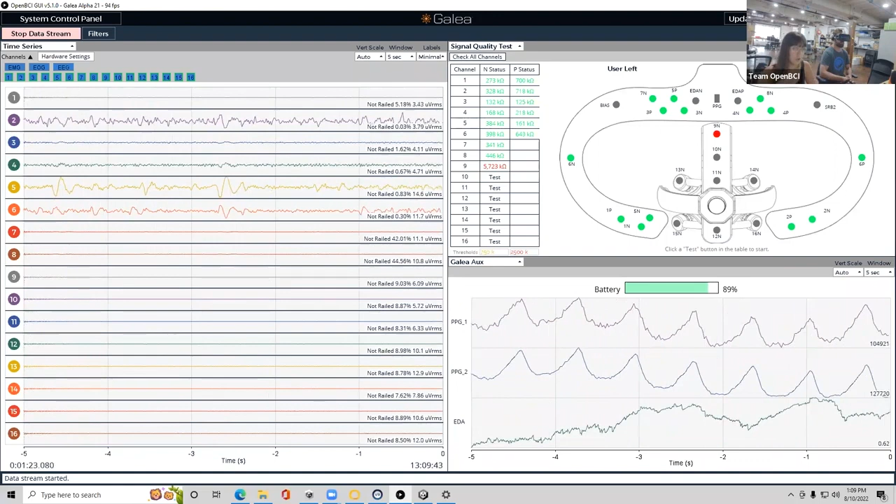So we've set different thresholds for the impedance measurement that we want. Below 750 kilo ohms, we deem it to be a good connection. Between 750 and 2500, it's okay. And if it's above 2500, then the impedance is too high and you should move the headset a little bit until it lowers, which means that the electrode is making better contact with your skin.

So right now, Connor just ran the test and we can see that all the channels are green. That's great, they all have a low impedance. And so we can move on to have a look at some of the data.

Another additional comment is that at this point, the impedance test only works for our passive electrode system, which is in the face interface. The harness that holds the headset on the scalp has the 8 active EEG electrodes in it, and those active EEG electrodes at this point in time prevent us from doing an impedance check, though we're working on a new hardware solution that will allow us to run the impedance check on active electrodes as well.

I think we can first show the auxiliary data and then show EMG, EEG, EOG, etc. If you look on the bottom right, the Galea auxiliary widget shows first the battery of the device and then the PPG data, which is the heart rate sensor, and the EDA, which stands for electrodermal activity, which measures the conductance of your skin, which will change depending on whether you're sweating.

So maybe getting a little bit nervous or stressed. If you look at the PPG lines, you can clearly see the heart rate. Especially when I drink a lot of caffeine, occasionally my heart will kind of skip a beat. But for the most part, you can see this kind of consistent cadence, the peaks and troughs of my heart.

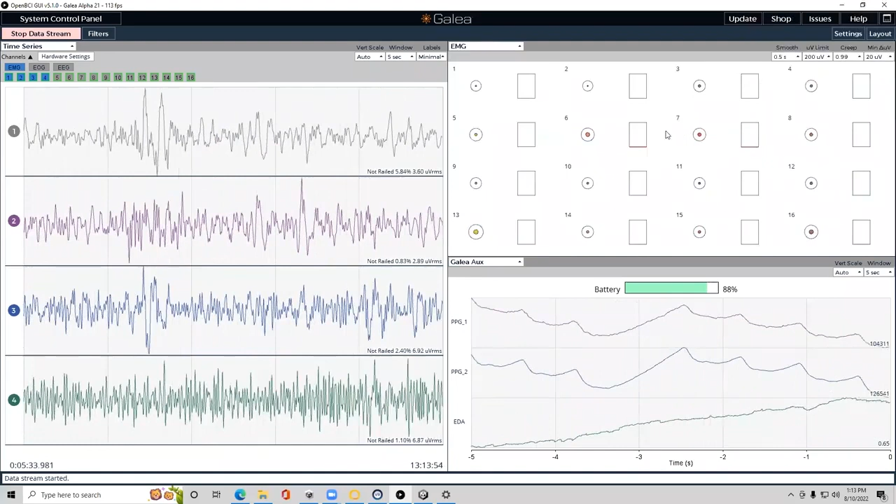You can see them on the left side. Right now we're visualizing the data with filters applied, like a notch filter for 50 and 60 Hertz. Let's open the EMG widget, which processes the data and normalizes it within the window interval that you choose, and the minimum and maximum values that you set.

We're going to do a short demonstration of how to trigger some of the EMG channels. If you smirk left and then smirk right, we'll see the spikes in the left cheek and right cheek channels. You can see them very clearly both in the time series widget and also in the EMG widget normalized.

When he's smirking left, it goes up to 1, and then right goes up to 1. He can do the same movement with the left and right eyebrows. Try 3 and then 4, 3, 4, 3 - that's left eyebrow raise, right eyebrow raise, left eyebrow raise, right eyebrow raise.

Let's do the mini game again so everybody knows I'm not cheating. Connor is leaving his controller on the table, and I'm going to call out a number, and he has to flex the muscle that corresponds to that channel. Let's start. 1, nice.

3, 2, 1, 4. Hang on, wait for it - that one is hard. There it is. Nice. 2, 1, 3, 4. Nice, gotta work on 4, that is the hardest one for you. Definitely, but I can see it. 1, 3, 4, 2 - so you can see that he has pretty good control over the 4 channels.

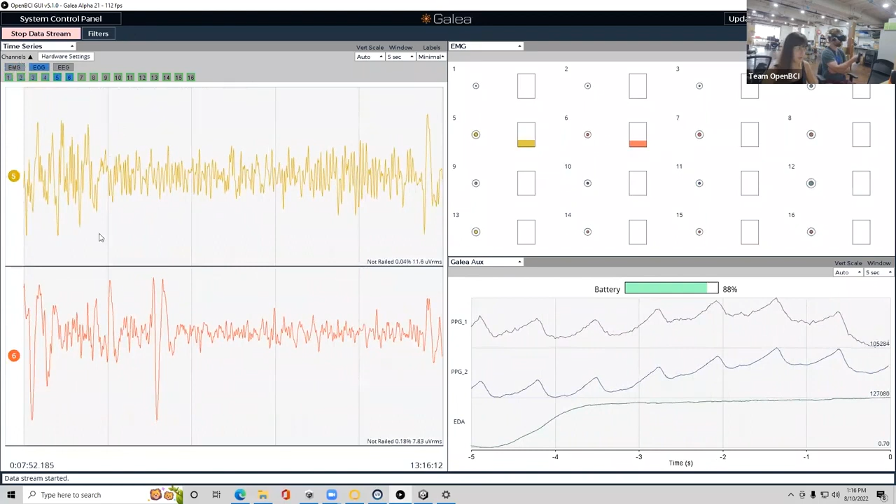EOG stands for electrooculography, and we have 2 channels for this. Can you open the signal quality widget again? If you look in the signal quality widget, we have a vertical EOG channel, channel 5, and a horizontal EOG channel across the face, which is channel 6.

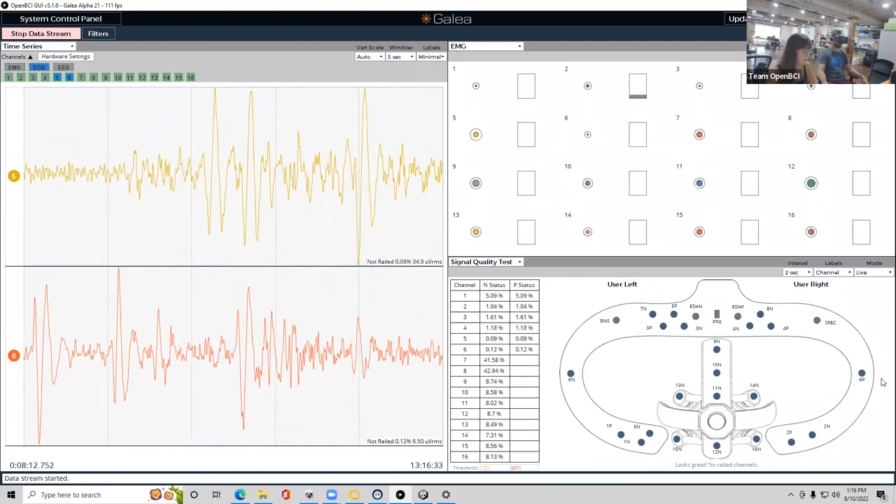To visualize the data properly, we have to disable the filter. I'm going to go ahead and do that. While you're doing that, I'll explain for those who don't know - your eyeball has an electric field. The way this works is we're taking a voltage measurement, or potential measurement, across opposite sides of the eyeball, both horizontally and vertically.

As you're looking left and right, we can see the shift in the angle of the eyeball as the orientation of that electric field is changing. Essentially, EOG is electrical eye tracking, which is obviously an extra data set we're adding to the image-based eye tracking that's in the Varjo Aero headset. Having those 2 data sets together, the EOG and the image-based eye tracking, will help us really validate and confirm the efficacy of both by combining them together.

Thanks for explaining that. I disabled the filters. So right now we're seeing raw data on channel 5 and 6.

Can you start looking up and down, up, down? As he looks up and then down, we can see the movement very clearly in channel 5, which is the vertical EOG. A little bit bleeds into channel 6 horizontal, which makes sense, but channel 5 is the main one to detect up and down movements.

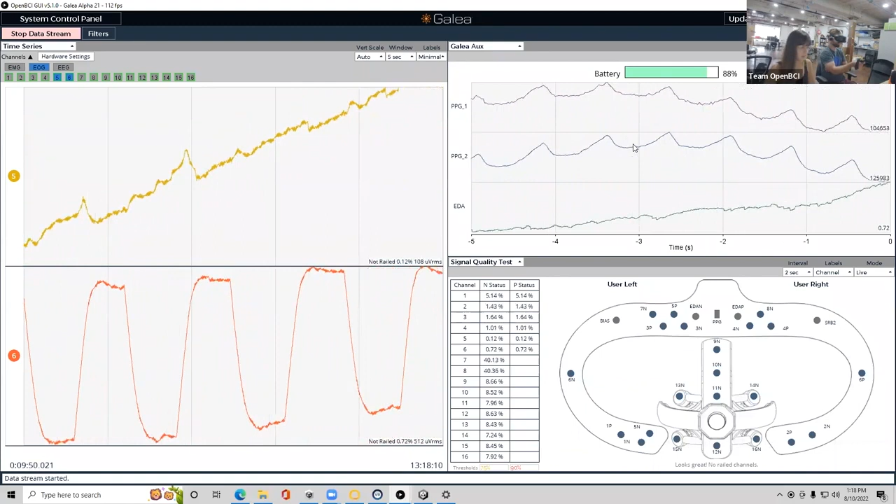Now if you do the same, but left-right eye movements, we also see that in channel 6. That one's very clear. We can also do a combined movement, like if you look to the top right, bottom left.

I have a theory as to why the horizontal looks better than the vertical - mechanically the horizontal electrodes are perfectly aligned through the axis of my eyeball, but channel 5 is actually not perfectly vertical. You can even see it on this diagram - channel 5P is not perfectly vertical above 5N. So there's an angled orientation of that measurement, which I think is part of the reason the horizontal looks much cleaner than the vertical. It's a theory, but we're improving that with the beta hardware design, better aligning channel 5 vertically.

There are actually a couple of questions maybe you can touch on. One was, why did we choose to do some active electrodes and some passive? Or maybe explain which electrodes are active and which ones are passive.

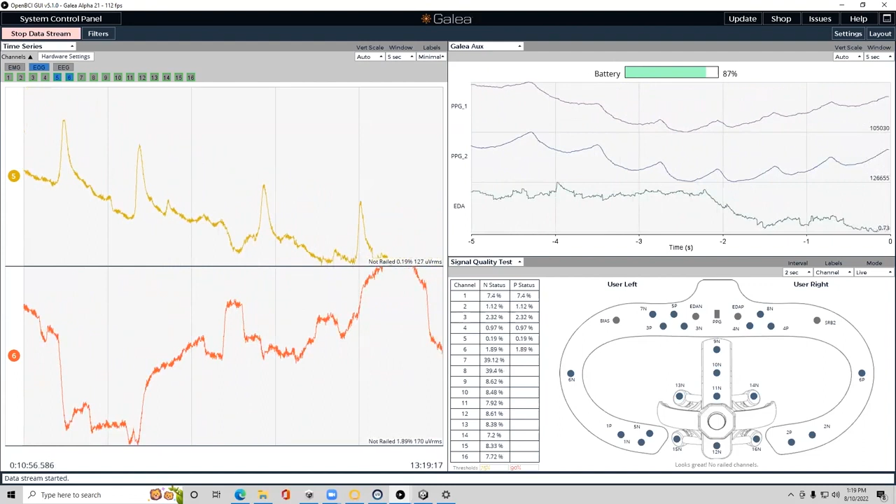We haven't shown EEG yet. Maybe I can quickly go over it, but later. I think when we show passive and active EEG, it'll be better to answer this question.

I can quickly touch on the theory behind this. The data we're collecting from the face is much higher in amplitude. When you're measuring EMG or EEG, it's technically the same physical unit, voltage over time, shifts in potential over a window of time. With anything generated on the face, the strength of that signal, because it's most likely coming from a muscle or even the eyes, is 10 to 1,000 times stronger than an EEG signal. So the active amplifier on the face would actually be overkill in many cases because the signal is so strong already.

The one exception here, and kind of a gray area, is channels 7 and 8, which are passive EEG channels integrated into the face interface. So we stuck with the same non-active solution for that entire collection of sensors. Additionally, the active electrodes on the back, unless you're bald or have very little hair, you're going to have to sample that data through hair, which is an additional obstacle. Because we have even more challenges in getting a clean signal, we felt that amplifying the electrodes from the scalp, the ones pulling data through hair, would be a good solution.

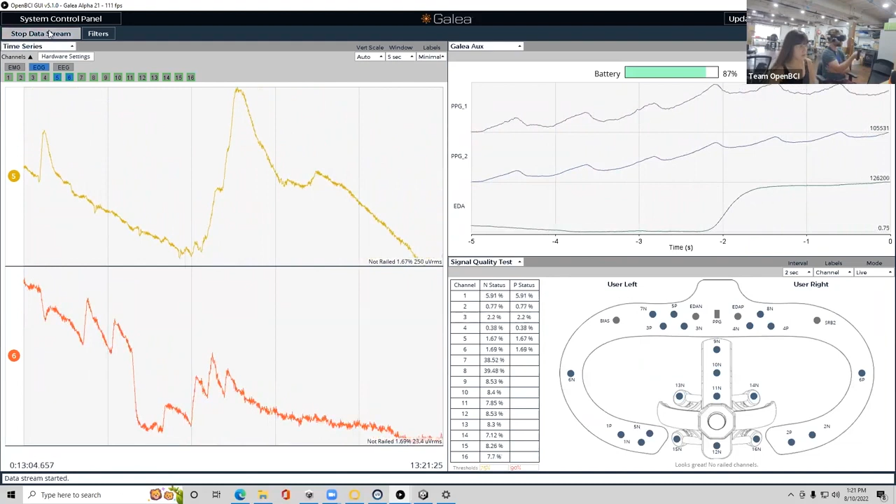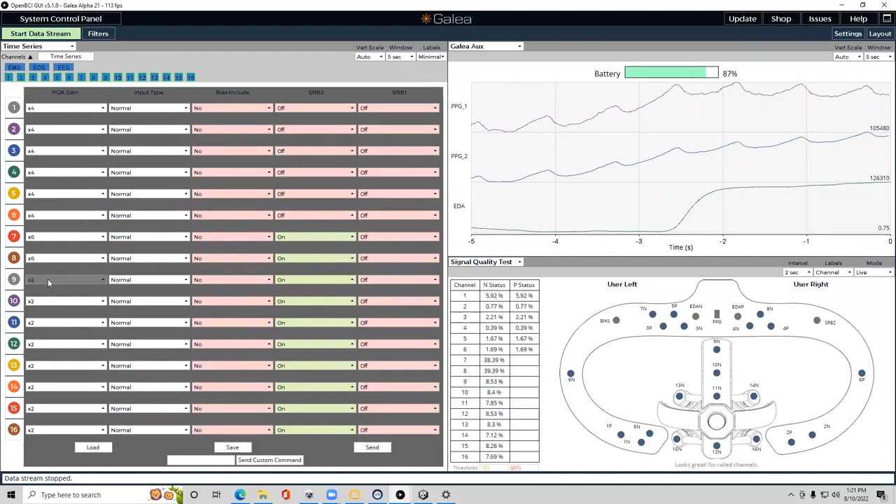Adding to that, if we show the hardware settings later — I don't know if you got a chance to see earlier when Connor opened them. The gain we are setting by default for the passive EEG is right now higher than for the active. It's a little small on the screen share, but we have the ability to configure the passive versus active electrodes differently.

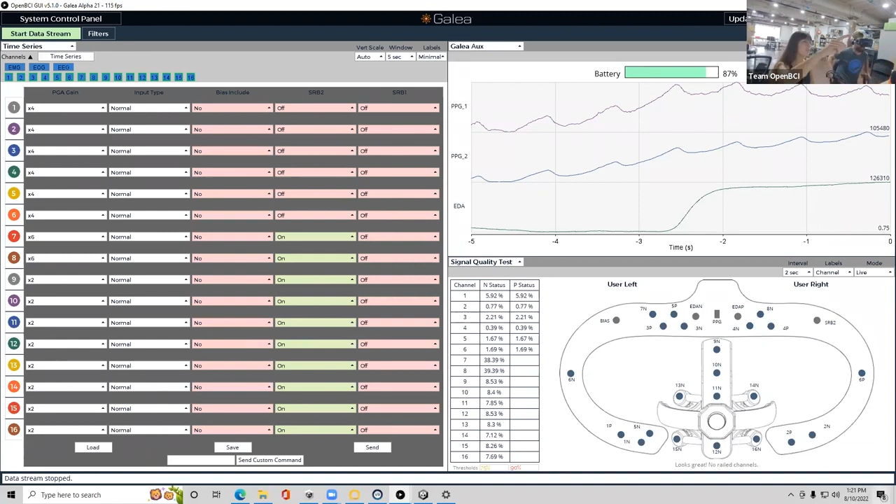If I lean in, do people see it better, since you guys are screen sharing? It's okay, I'm sharing the screen directly so they see my monitor. All right, I'm going to start the data stream again, and I'm going to put the filters back on.

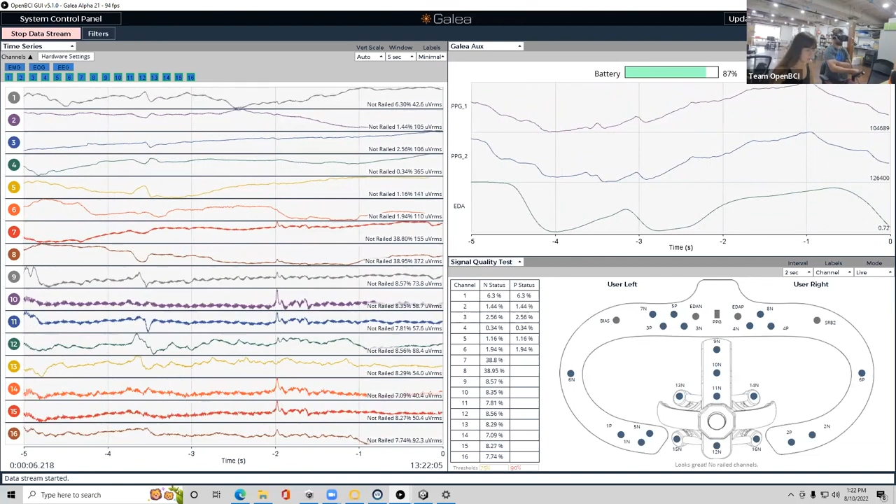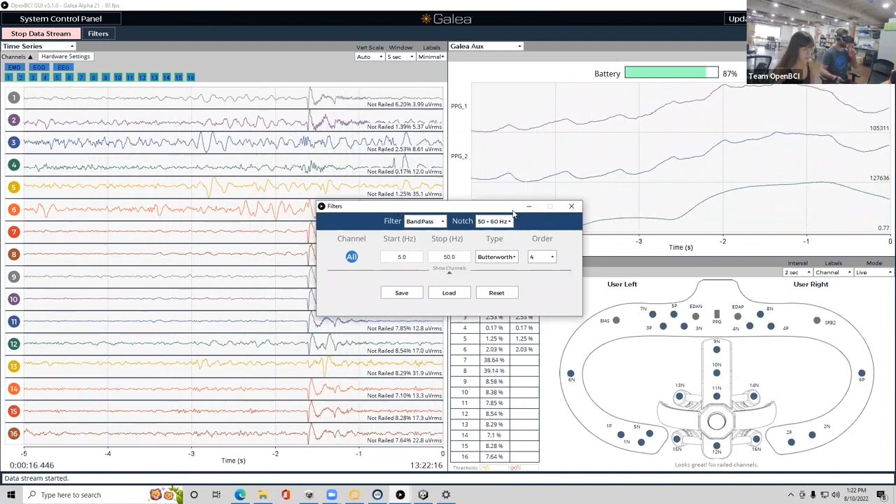We have the active electrodes set to the minimum gain. We don't really need to increase the gain for them, and we get pretty good data, whereas for the passive, we've increased it a little bit.

Okay, so the filters are set — did you have another question, Joe, or should I carry on? There's a general question about how sensitive all of the electrodes are to movement. I'm not sure if we can incorporate that into what we have planned today. Might be good for a future session or recording, but keep that in mind as you continue.

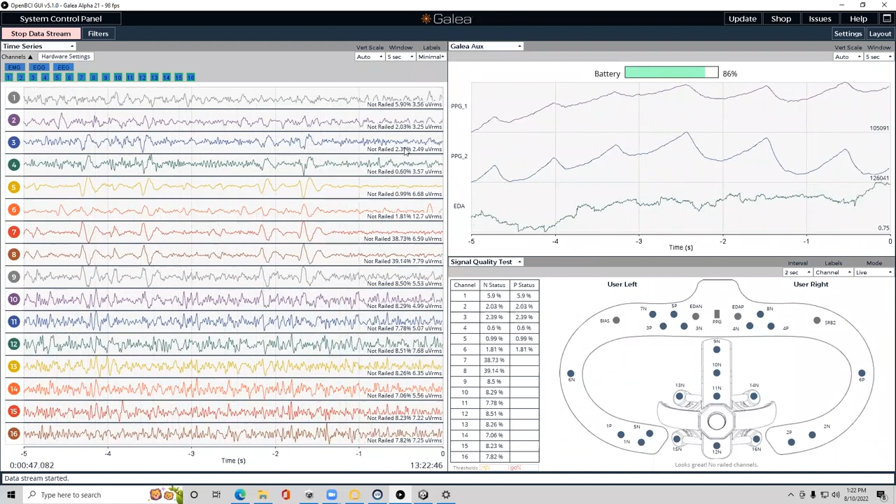Let's show some blinks on the passive EEG. Passive EEG channels, like Connor mentioned, are 7 and 8, and those are located on the forehead. They're very good for detecting blinks, for example.

If you blink in blocks of 5, you can see them in the time series very clearly. He just blinked like 5 times. You can also see the blinks in some of the active channels because he's flexing his face, especially in channels 9 and 10, since those are closer to the face on the front of the midline. But 7 and 8 are the best channels to visualize this.

Let's open the Fourier transform and band power widget. These are two widgets we use to visualize EEG data. The one on the left is a fast Fourier transform plot, which shows you the frequency spectrum of the signals, and the one on the right is a band power calculation.

One of the tests that we run for EEG data usually is producing alpha waves. Alpha is the frequency band that goes from 8 to 13 hertz. And when a person closes their eyes and relaxes, usually that frequency band will peak.

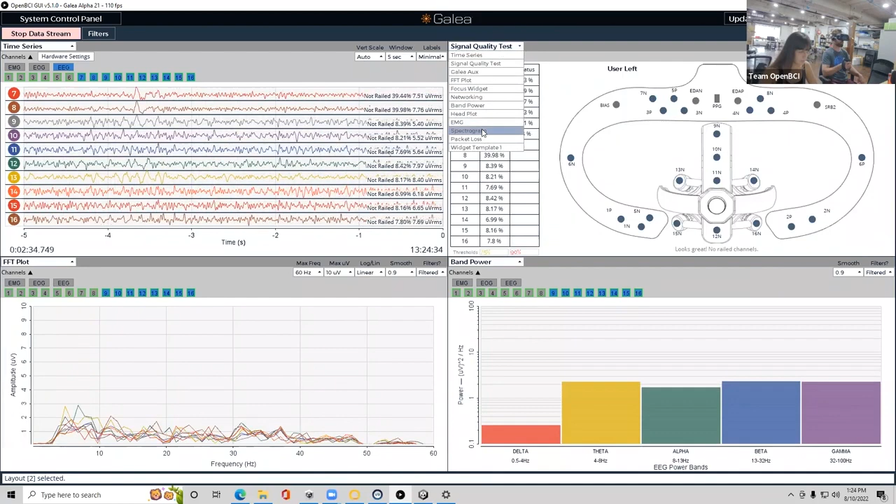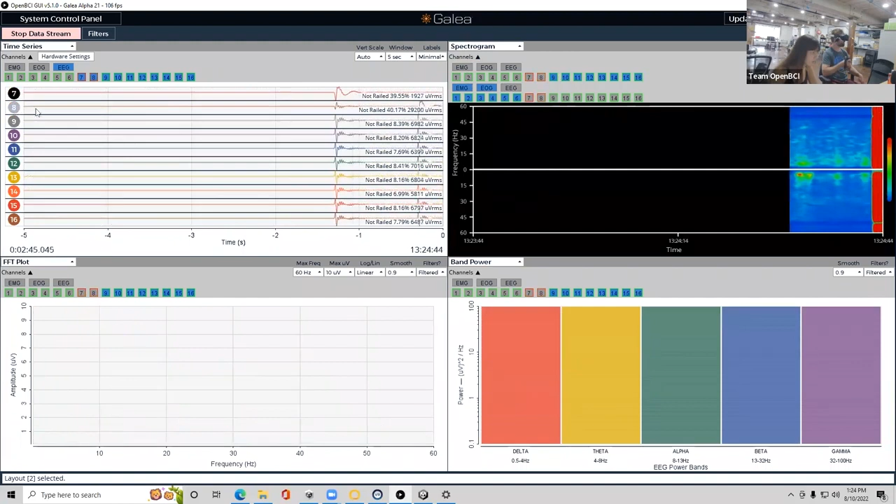Just bring up the spectrogram. Can you hide 7 and 8 from the time series? Or just take them out of here completely. Got it, so that it makes the signals a bit bigger.

Connor also opened up the spectrogram, which provides a nice visualization. I'll bring the max frequency into 20, since we're not looking at anything above that. On the spectrogram right now, on the top we have channels 9 through 16, which are the active electrodes, and on the bottom it's EMG and EOG data. The active electrodes, as you could see earlier in the signal quality widget, are located on the midline and the back of the head, the occipital region.

Let's try to make some alpha. Right now Connor has his eyes closed, I can tell because his alpha power band is peaking above the rest. And if you look at the Fourier transform, the frequency spectrum, you can see a big peak that goes up to 10 microvolts or even higher at around 10 hertz. The frequency of the peak will change a bit depending on the person, but it's usually in the range of 8 to 13 hertz.

Can you open your eyes? Now he opened his eyes and all the bands are back to being more or less the same, so alpha is not peaking anymore. And if we look at the spectrogram, you can see a clear increase at around 11 hertz.

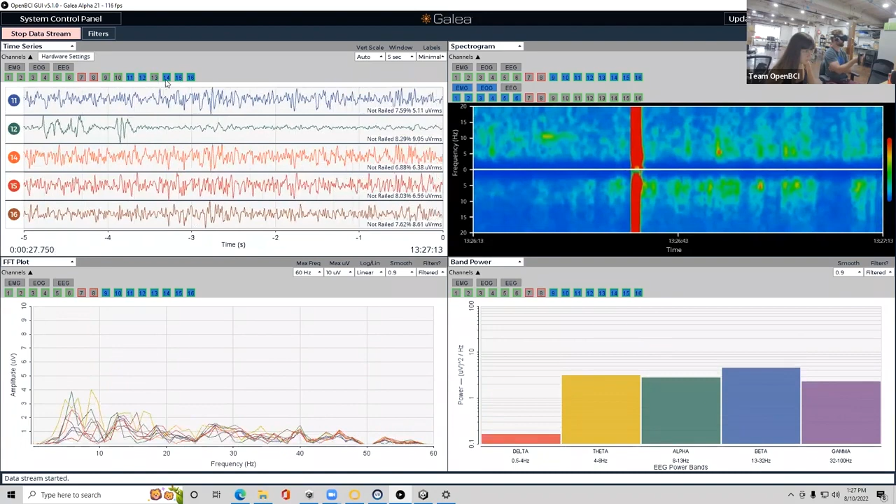What I want to do is turn off 9, 10, keep 11, 12, and 15, 16 — these are probably the ones that, if you look here at signal quality, 11, 12, 15, 16 are the ones that are arrayed across the visual cortex. So this is where we should see the strongest presence of alpha. I'll turn them off here too.

I'll try and do that again. Actually, if you could see the distinct waveform in the time series especially, let's pause because this is a pretty cool instructional moment. Oh, I need control of the mouse. Okay, I paused it, all right, cool.

So now what we can do here, if you're not familiar with brainwaves, this is probably the clearest demonstration of how to diagnose a brainwave. Can you see my cursor still? Yeah, okay, there it is. So let's go here between T-3 and T-2 seconds. If we count 1, 2, 3, 4, 5, 6, 7, 8, 9, 10, 11 — between t-3 and t-2 seconds we count about 11 waveforms.

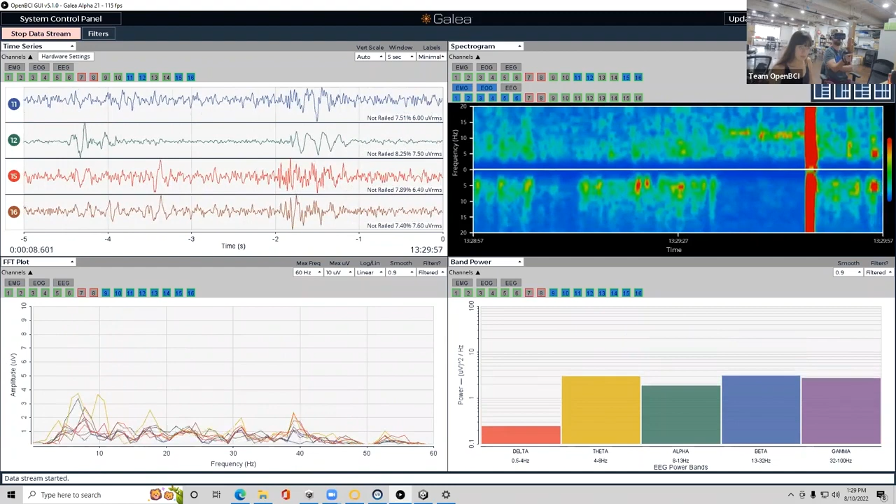Okay, let's change the layout to be 3 widgets again. So that's EEG data.

We have a few more widgets, can you open the dropdown? For example, the networking widget, and also we have the packet loss widget that you can open if you want.

All of the data from the different widgets can be streamed out of the GUI in real time by using the networking widget. So the networking widget allows you to use different protocols. We have serial, LSL (lab streaming layer), UDP, and OSC options available. You can basically select the data if you open the dropdown.

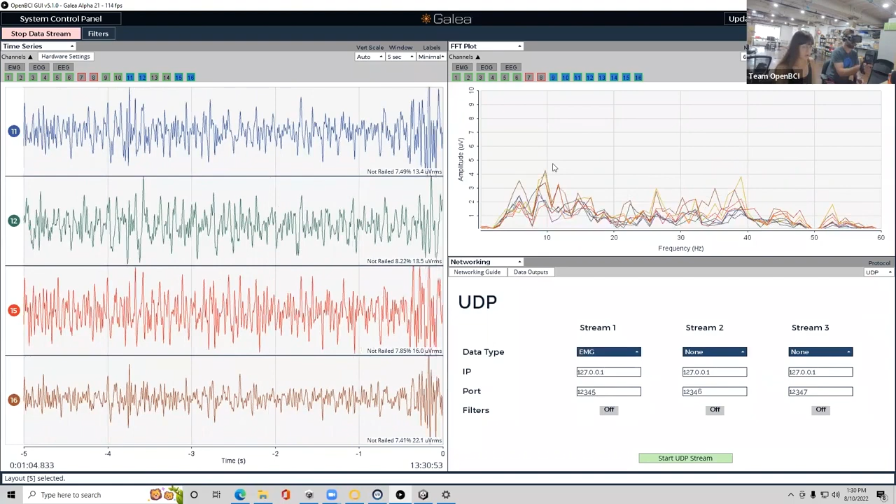You can select the data from any of the other widgets, plus a couple more additional calculations that we've added, and start streaming it out in real time, then catch the stream with different applications such as Unity, Unreal Engine, MATLAB, whatever you want to use.

In the last webinar, we showed you a couple games that we've developed in Unity using UDP. For those games, we were streaming EMG data out of the GUI using the networking widget, and then catching the stream in Unity and playing a game similar to Temple Run, where you control a cat running through the city. I don't know if we want to show that in this.

Let's do it afterwards. Let's demo. The big thing that we want to show off this time is that we're starting to make progress

on the SDK side to cut the GUI out as a necessary middleware for getting processed, filtered data directly from the Galea device into Unity or other game engines or 3D engines. So what we've started to do is strip down the GUI into its fundamental backend data blocks, and started porting a lot of that stuff directly into Unity using BrainFlow as our underlying SDK.

Over the coming year, we're going to be porting a lot of the functionality and utility that's in the GUI directly into the VR experience that I'm currently inside of. So you won't necessarily need the GUI running secondhand in the background to validate signal quality and do basic filtering and data routing.

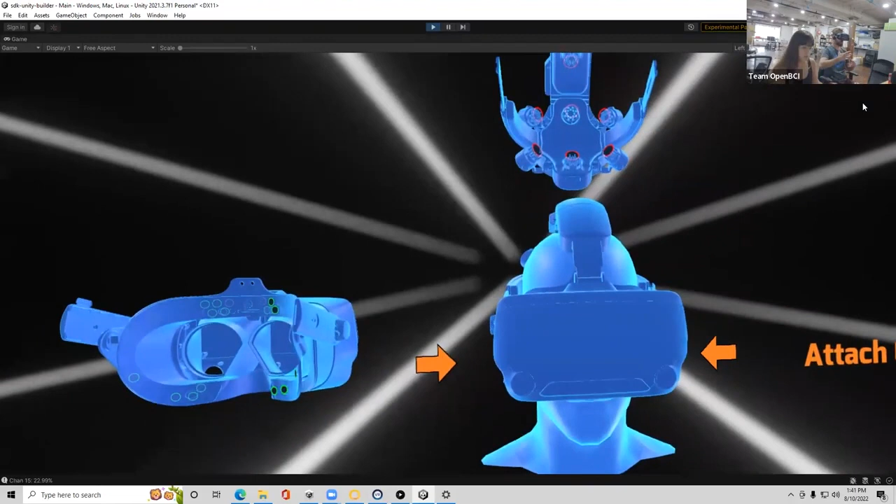Now I'm going to take off the ear clips, and let's see if the system notices that I've taken them off. This may take 10 or 15 seconds. There you go. Check that out - I took the ear clips off, and now my active electrodes, because the system is no longer grounded into my body, those signals have the potential to DC drift away from my electrical ground plane. It took 5 seconds or so, but now those signals are way, way off, and the headset knows I need to reattach the ear clips.

So let's see if I can do that, and let's see if it notices that the ear clips have been reattached. Nice. Cool. And so now it's noticing that initial diagnostic.

Which is the top of the headband, which we may just have to tune this because it feels like it's on pretty good. See if I can get it. This would be a big win if I can get this one on. I'm going to call yellow a win - we're going to call yellow a win for right now.

Yeah, so that's pretty cool. Not bad for a first live demo. So hopefully, this is going to evolve a lot, especially as the headset design changes. The mechanisms and the recommendations for adjustment are going to be updated as well. But we believe that this is going to be really helpful for using Galea in the wild, especially as more units get rolled out and we start to find applications for the device.

Were there any more that we wanted to show, or any other demonstrations within this? Maybe try some of the other recommendations - we have them pre-programmed. So I think we're good. I think we showed most of them - that worked really well. Cool, cool.

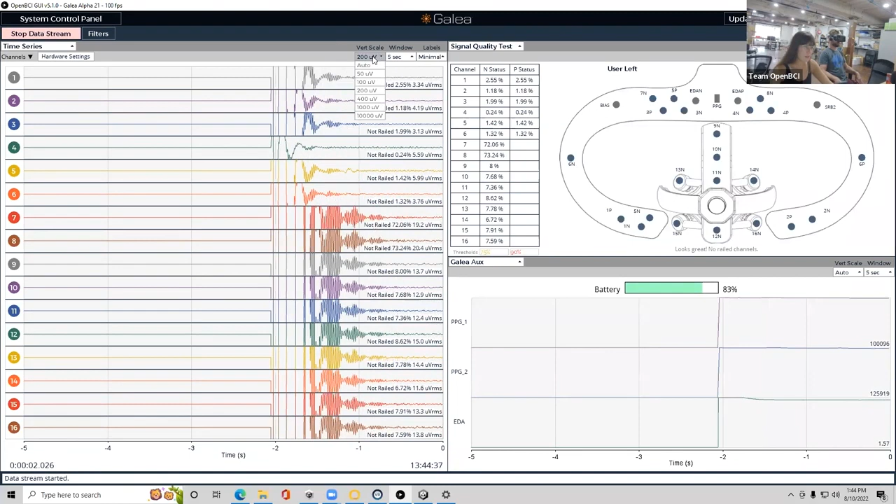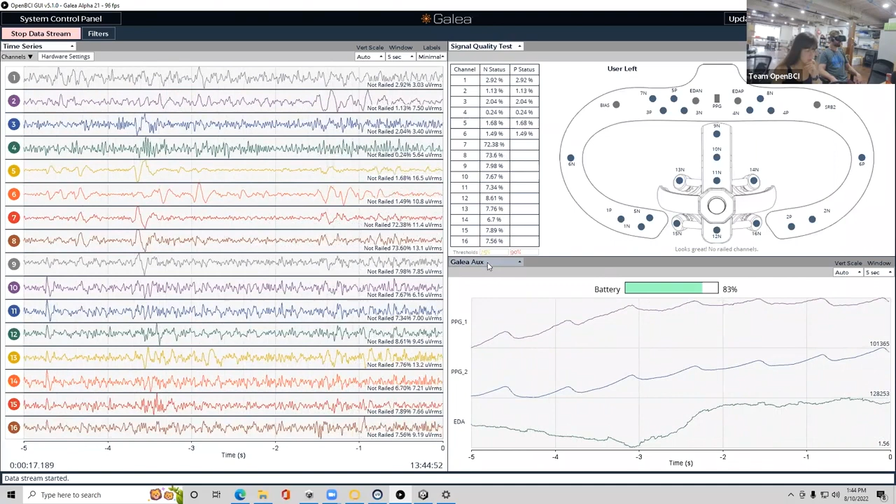So we're back in the GUI, and Connor can see the GUI in VR as well. I'm going to show time series data, which is the 16 channels on the left. The first thing is to open the networking widget, and then as the protocol, I'm going to select LSL. For data type in stream 1, I'm going to select time series, and I'll turn the filters on and start the LSL stream.

And then I go to the iMotions software, and I think it's preferences, sensor settings. So we already set it up yesterday, but we basically made a profile for the Galea device and then searched for existing LSL streams. So it found one, which is the one I'm outputting from the GUI. I selected it and saved the settings, and if you look on the bottom, it says that it's first connecting, now collecting.

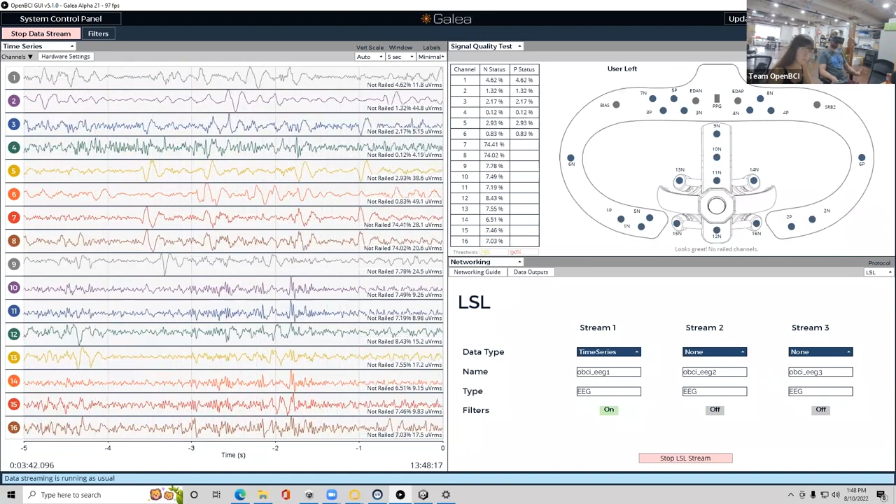I think what's also going to be really interesting is having the ability in Unity and Unreal to script objects of interest or interaction logic into game objects, where we can programmatically identify when a Galea user has interacted with an object, whether they've touched it or grabbed it, or looked at it with image-based eye tracking, and then flag the data being recorded with these event markers integrated into the VR experience. This is something we're putting a lot of thought into now, how do we automate a lot of this stuff?

As a developer, if you're creating a VR experience or an experiment in Unity or another 3D engine, how do we automate a lot of that kind of marker and epoch binning, around the before, during, and after interactions within a game experience.

iMotions is also one of the softwares we're integrating with. We're also looking at other software, and if you have suggestions of applications you'd like to use with Galea, just type them in the chat, it would be good to have suggestions of what software we can integrate with. We'll actually be following up with a survey for anyone that attended, to ask for topics for future webinars and other integrations or demonstrations that would be interesting.

Another related question, from John Griffiths: is there an accessible spare channel that could be used to capture triggers from other sources marking events, for example a TTL pulse or an analog signal? I think not for Galea, but maybe I'm wrong. Connor? We don't have one for Galea currently, but it's something we've been discussing for the next hardware version of the device. It's something you can do with the Cyton and the Ganglion and some of our other boards.

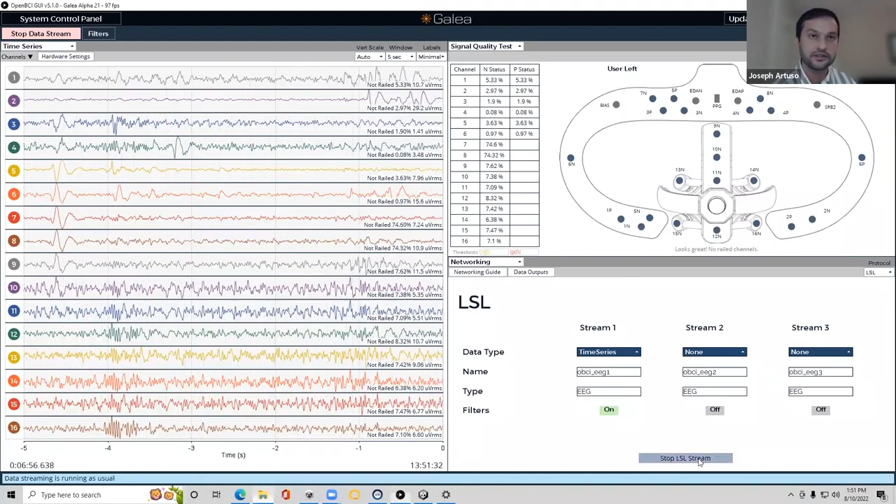If we have time, I think it'll be good to quickly show Cat Runner for people who didn't join the last webinar. Yeah, why don't we do that, and then we'll give everybody a chance to go through the questions in the Q&A window, upvote the ones you want to see answered, and ask any new ones in the next 20 minutes or so. Oh, it's UDP.

I'm just going to quickly run one of our demos that uses the networking widget in the GUI to get the data, as opposed to BrainFlow, which is what we showed earlier with the adjustment instructions for the headset. So Connor just opened the networking widget and changed the protocol to UDP and the data type to EMG. I'm going to go ahead and start the UDP stream and then launch our game.

Oh, I think you grabbed yours. It's okay. It's loading, it takes a couple seconds.

I'm updating my settings. Maybe you can give a short explanation about the parameters while it loads, and how to adjust them. Sure.

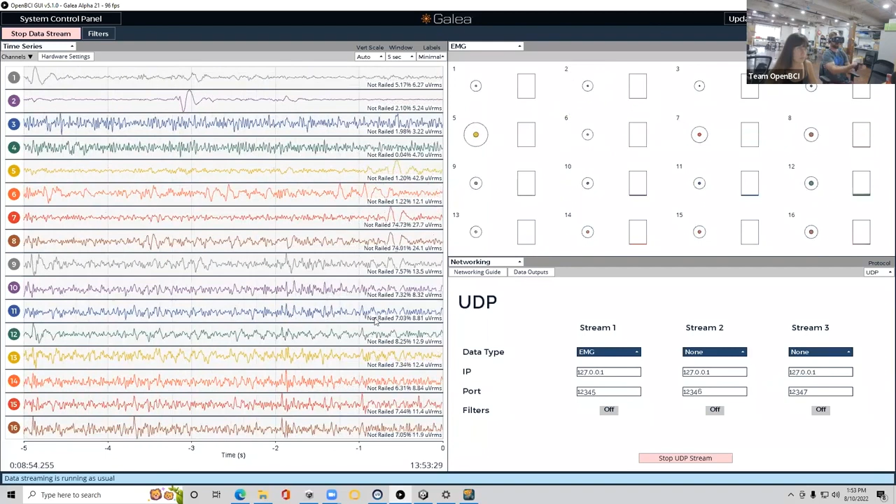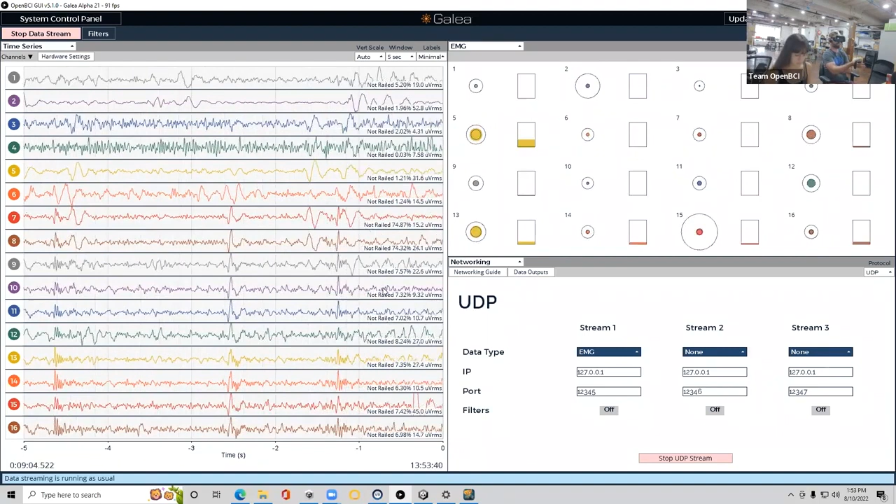So this is at least a quite rudimentary mapping. We're actually for this demo only using 2 of the 16 EXG channels. But I think one of the big use cases of Galea is looking at the motor function around the face and scalp for new types of real-time input or interaction. I'm a big believer in using motor function and EMG for real-time interaction, and using EEG and other stuff for more passive opportunistic sensing. But in this demo, we have a pretty straightforward mapping between the EMG on my face to the control of a character in a game. Obviously this could be used for games, but this technology could also be very valuable for individuals with motor disability who are looking for further autonomy or more control over digital interfaces. So let's jump in and play this game.

Let me just pull up the VR view for them. Right now they're seeing the GUI, so I'll move the GUI to the other screen. Am I in? Are they in? They are in.

Right now, what you can see is Connor's VR view. He left his controller — oh, there it goes. He's using his left and right cheek to control the lane that the cat is running in, trying to collect all the tokens and avoid the rats and other obstacles.

Nice. So yeah, this is one example of us using the EMG data from the face as a button and integrating it into a Unity experience.

We have some other examples of how to use the EEG to create a meditation room experience, where the lights and audio are adjusting based on your EEG signals. This was one of the questions around how do you actually sync with the immersive experience itself and measure behavior. Right now we're showing ways to use the data to control or change the experience itself. And then, what Connor had talked about earlier was we're starting to work on, especially when you get the image-based eye tracking as part of it, how can you automatically tag the physiological data that Galea is collecting with interaction points or events from Unity or from the VR experience.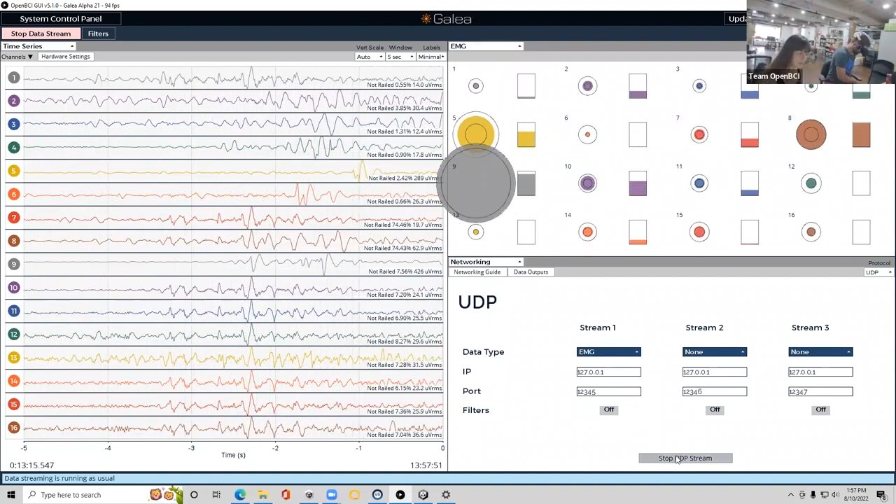I don't know if we'll be able to communicate it clearly, but Connor, you want to walk around in the background a little bit while the time series is up? Sure, let me pull up the... I could do the spectrogram as well. That's pretty good, a flurry of votes for demos as well. So maybe after we do a little walk and talk, we can pull up more demos. I can hold the cable.

The VR. So one thing that we learned from the Ultracortex, and a disadvantage to the Ultracortex, is that, maybe not everybody listening is familiar with it, but that's the 3D printed EEG headset that goes with our Cyton and our Ganglion boards. The Ultracortex is kind of spring suspended, and it does rattle around, it actually kind of wobbles on your head. So one technique to removing movement noise is to make sure that, to the best of your ability, the system is pretty rigid and not dynamic relative to your scalp. You want the headset to be ideally moving with not much inertia or movement relative to the scalp.

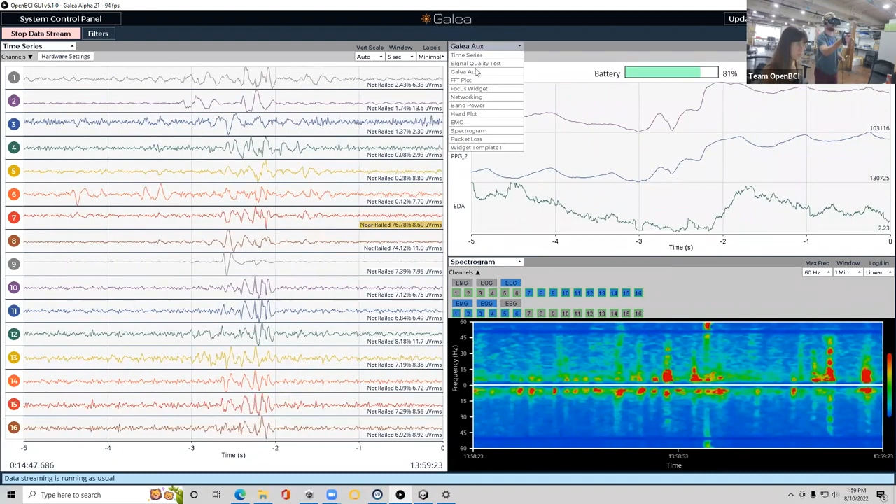So you can see here, as I'm wobbling back and forth, you don't see any large DC shifts in the time series data. And I'm also talking simultaneously, which is, anytime actually the EMG, I think, is good for showing the sensitivity of movement. So if I start shaking my head like this, you're going to see a lot of movement noise, right? But it's to be expected if I'm moving my head this much. The movement noise is always going to be an issue, and I think that's an obstacle for EEG.

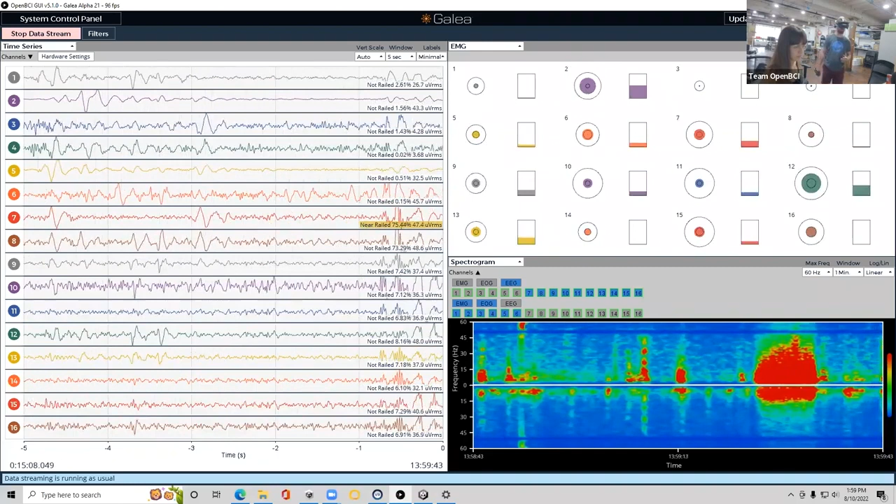It's not as much of an obstacle for other data types, especially image-based eye tracking and moisture on the skin and stuff like that. But relative to the Ultracortex, the movement noise is substantially lower with Galea, and I think that's as a result of a lot of the learnings from building that headset.

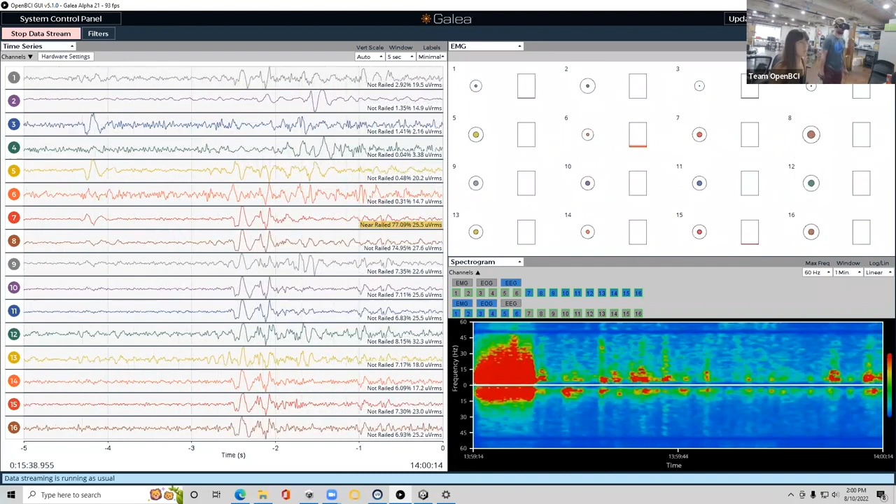But hopefully you guys can see that I'm moving. Obviously not quickly, but I am moving around, and we're still seeing pretty decent time series data. Yeah, cool. I think we'll have to think about good ways to communicate this, because it's a popular question that's come up.

And then, so a lot of people want to see extra demos. Maybe we can pull up, I guess it's up to you guys, the Synesthesia room, or I think the meditation one's good. It's kind of a different type of data that we're using. Yeah, I'll launch Synesthesia room. That's my favorite one.

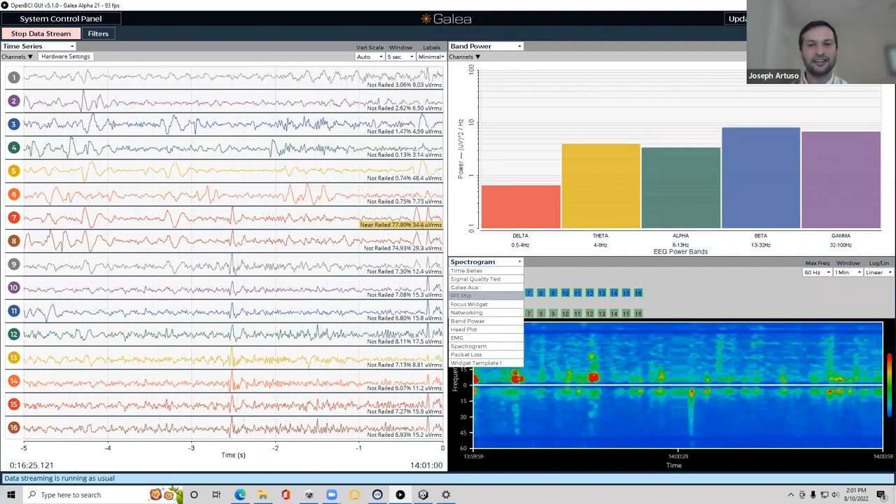Connor, another question, maybe an industry trend question: how long do you think it will be before the Quest has BCI integrated there? How long till BCI and VR go mainstream? Where do you see the industry going? Those are two different questions. How long do you think before BCI and VR goes mainstream? Where do you see the industry going? Nice, BCI VR mainstream.

I think the next major computing paradigm shift is going to be computers onto our heads. And when we get there, when we have displays, it's already happening. You've got HoloLens, you've got Magic Leap, you've got the Oculus that all have a CPU integrated. That trend is going to continue. And I think the computers of the future will be physiologically enabled and highly personalized. So EEG, eye tracking, the same stuff that we have in our smart watches and our Oura rings for measuring SpO2, heart rate variability.

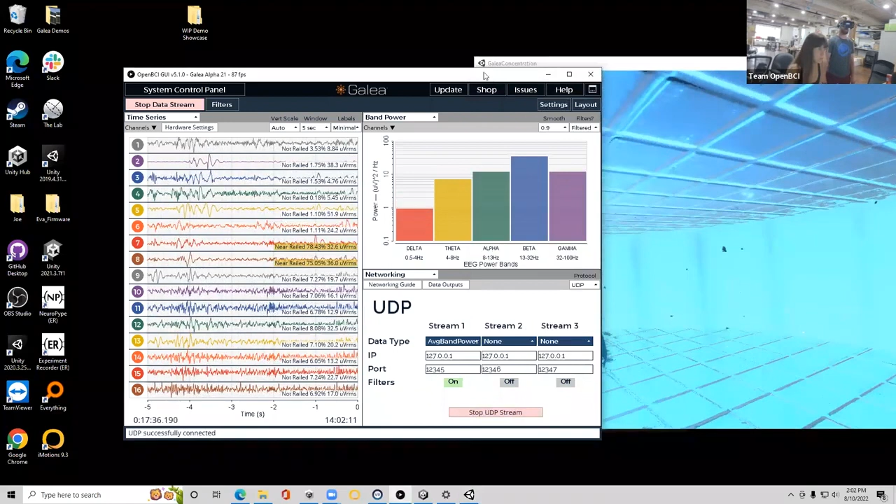All of that is either going to be connected devices to the headset or integrated into a headset. So in the next 5 years, I believe that we'll have mixed reality headsets specialized for work, for leisure, for different things like that. But I think work, and then also medical applications, are going to be some of the areas where we first start to see widespread adoption of BCI plus AR and VR. But I would say, yeah, it's inevitable. This is just the beginning. This is way clunkier than it's going to look 5 years from now.

Cool, I just pulled up Synesthesia room. So what data is this using, Eva?

So Synesthesia room is an experience that uses EEG data. In particular, we are using the band power data calculated by the GUI. The idea for this experience is that the room changes color based on the band power data we're collecting from you. The colors that the room changes to match the colors in the GUI. So if you can pull up the GUI, that would be helpful.

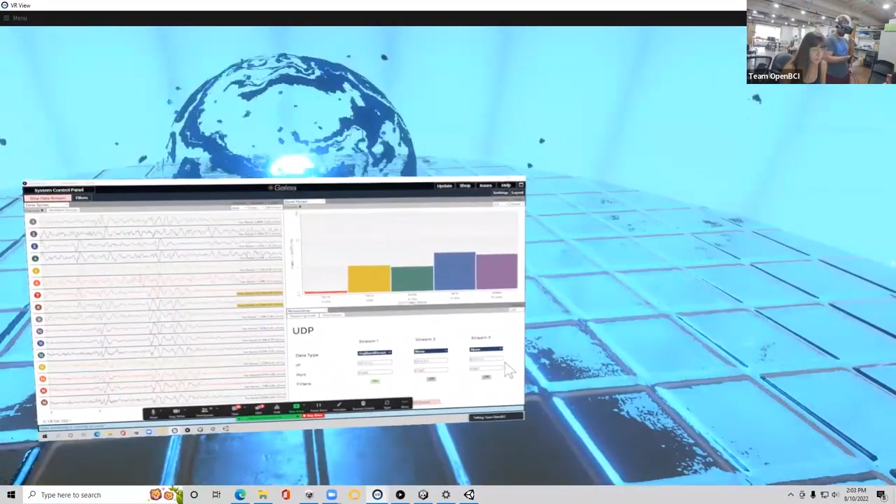So depending on whether you're making more alpha, theta, or beta, the room will be more green, yellow, or blue. You can use this room as a neurofeedback training tool to learn how to relax or how to concentrate better. For example, alpha is associated with a relaxed state, and it occurs when you close your eyes. So in this room, whenever you close your eyes and relax, the color will become green.

And also we've mapped different musical notes to the colors. I don't think you guys can hear it in the Zoom right now. It's in my headset actually. Let me try and put it on the speakers. It might be a little annoying, but hopefully not. It's pretty cool because if you get used to it...

We don't hear the audio at the moment. I'm going to try, it's in my headset right now. Can you hear it now?

Yes. Okay, so the audio also changes based on the frequencies that your brain is producing. We added audio so that you can also have some sort of guidance when you're closing your eyes, for example, and you're not able to see the color.

So right now you have your eyes open, right? Now just close them. I can see that his alpha is peaking, both because the room is turning greenish, and also I see the GUI, so I can see the spike in alpha. So you can see that the room is green because he is relaxed and he's producing more alpha than the other frequency bands.

Nice. There's also a particular note associated with alpha. I don't know if you remember which one it is. But by using this room over time, you're able to tell the difference in the sound as well.

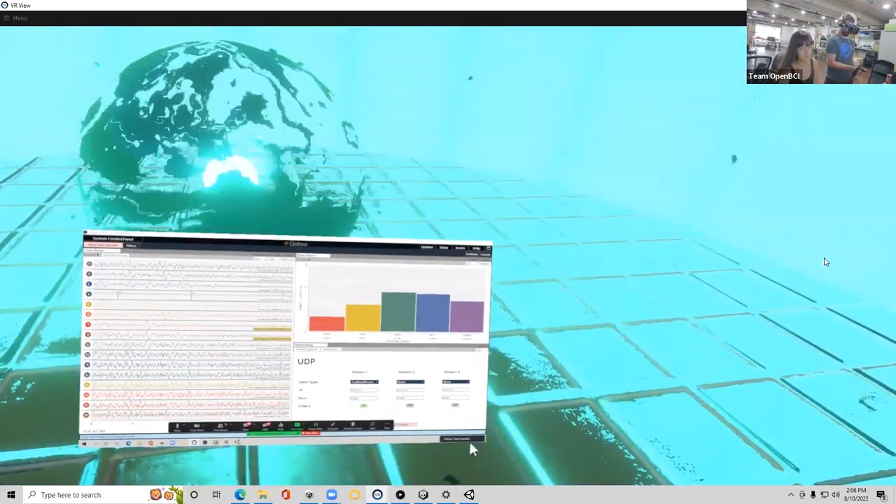Even in the early stages, this room has been helpful for me, particularly because I actually struggled to produce alpha, and I've been trying to train my brain to give higher peaks. I've been jumping into synesthesia room on Fridays for a bit. And the other day we could see the first alpha spike my brain ever produced. So it's been, even though it's still a raw thing, it's been helpful.

So proud of you, Ava. Thank you, I'm proud of... Another popular question.

Have you talked at all about what we've done to shield the electrodes or the electronics from outside noise?

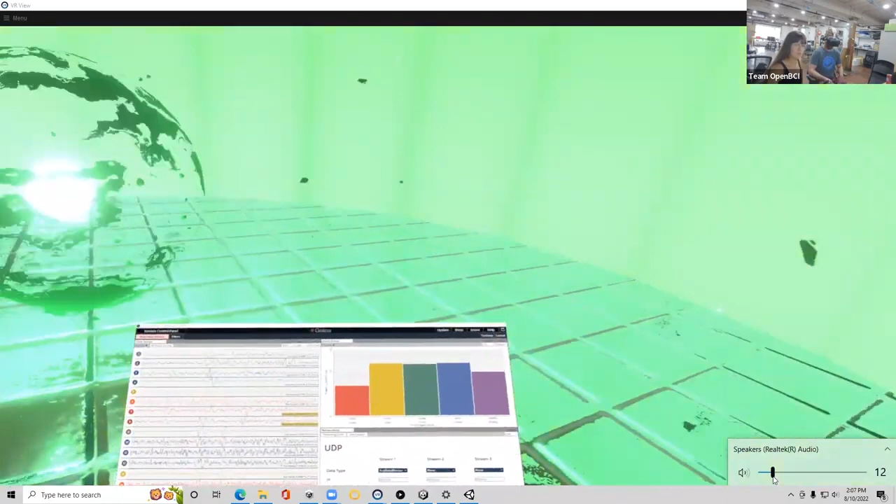Yes, let me lower the music actually. Yeah, hear you very well. Do you want me to keep it open? Oh, that's okay, yeah sure, either one, it's fine. Nitesh asks whether we've shielded the electrodes themselves from outside noise. Oh I see, let's close it then because it's making a lot of noise. Sorry Joe, we had the music on. That's okay.

Back to the GUI, back to the GUI. Old faithful. Okay. Can you repeat the question? You're back to seeing the GUI, right? Yeah, I see.

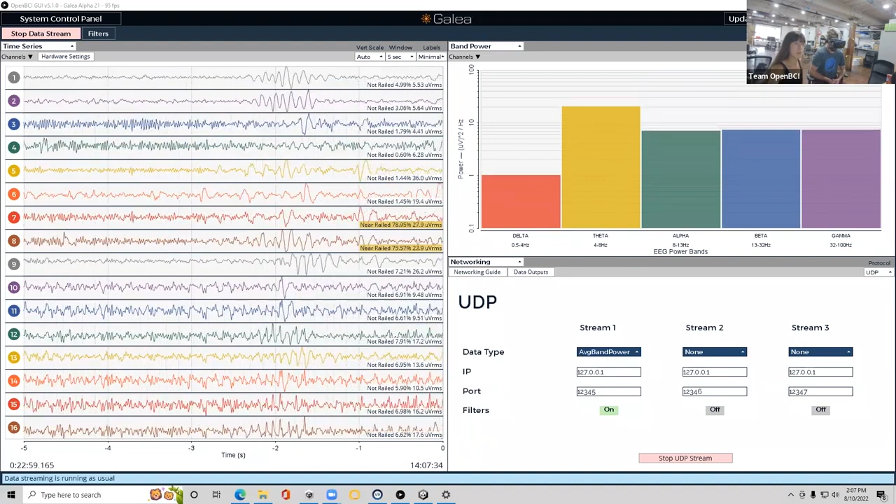Nitesh asks, are the electrodes shielded from outside noise, or is he wondering if the electrodes are shielded in any way, or what we've done on that front. So yeah, the active electrodes have shielded cabling, and that's the extent of the shielding at this point, while we are exploring more sophisticated shielding options for the beta units and integrating more shielding into the actual enclosures for the device. Yep, cool.

There's also a question, I think it might have gotten dismissed, but there's a question around whether it's possible to export raw data, like the raw data that's being saved from Galea—does it have any filtering applied, or is there any filtering applied to the raw data that's being saved, or is it kind of fully unfiltered? And is it possible to add filters to the saved recordings?

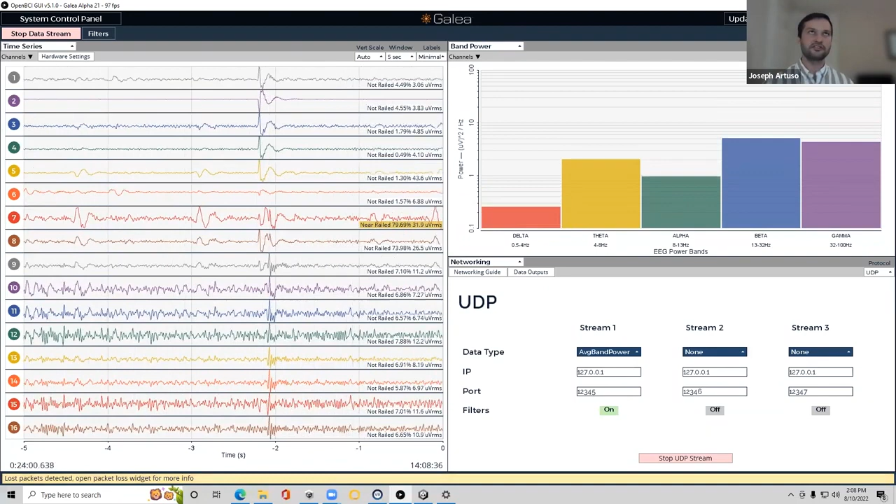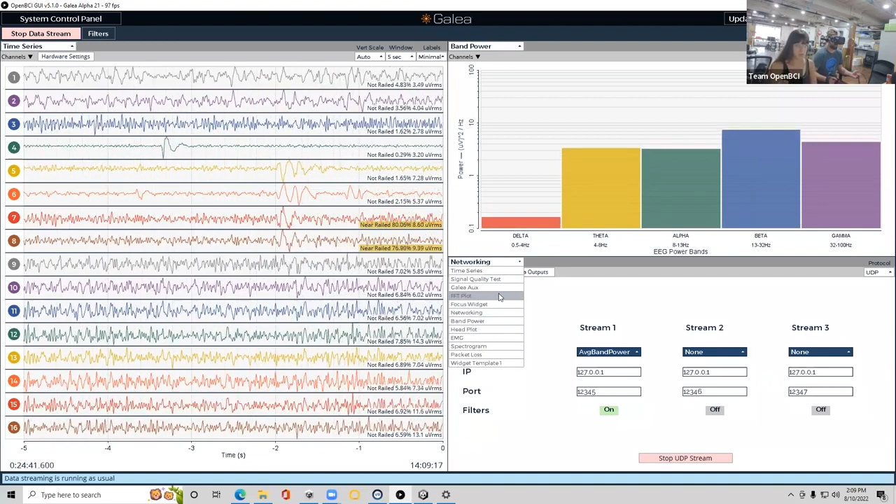So the data that is being saved right now to a CSV file is raw data. After every time you initialize a session with the GUI, the data gets automatically saved out into a TXT or CSV file, and that is raw data. When you use the networking widget and send the data out, you can choose to apply filters or not. The GUI also has functionality where you can replay data saved from a previous session, and when you replay that data you can apply any filters you want, but the filters are not applied to the values in the TXT file itself.

It's something we could consider adding though, if it would be helpful. I think it would be easy to save the filtered data in a separate file, for example.

The other most popular question at the moment, and we might not have this, is about what is the latency from generation of the signal to detection and then back to the GUI. So how long from when it happens on the body, until we're seeing it on the screen and in the data?

That's a good question. I'm gonna quickly open up the timestamp file because I think it would be helpful to answer this.

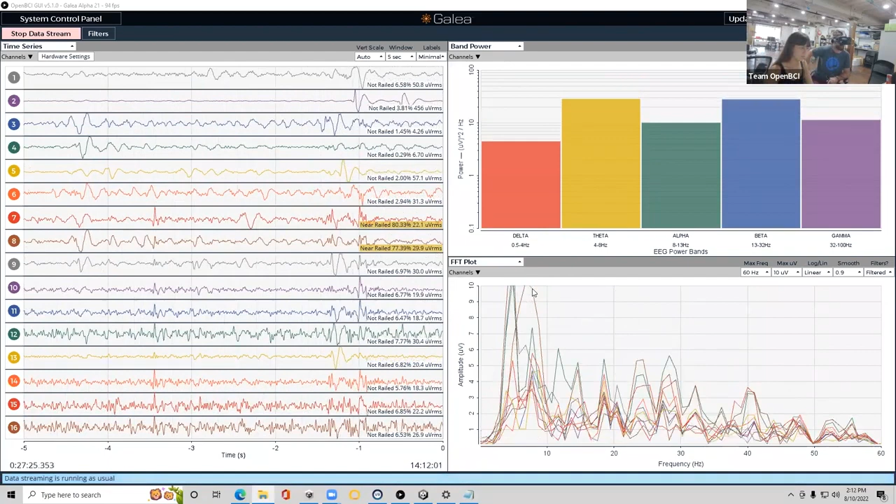Cool. We've got a question. We're working through most of the questions. I have a question for the audience: for those of you interested in coming back for future sessions, what are you interested in seeing or hearing us talk about for future webinars? Just drop that in the chat if you have anything. Yeah, because there's lots of things we could do.

We could talk about the industrial design and mechanical engineering process of going from no headset to prototypes to building a product in quantities of hundreds and thousands. We could talk more about the software stuff and focus on the features we're implementing on the software side, but we also want to know what people want to hear about.

Motor imagery, eye tracking, spatial source localization, the roadmap, and engineering challenges - these are all some of the answers. Thanks guys, great, that's good feedback. We're listening.

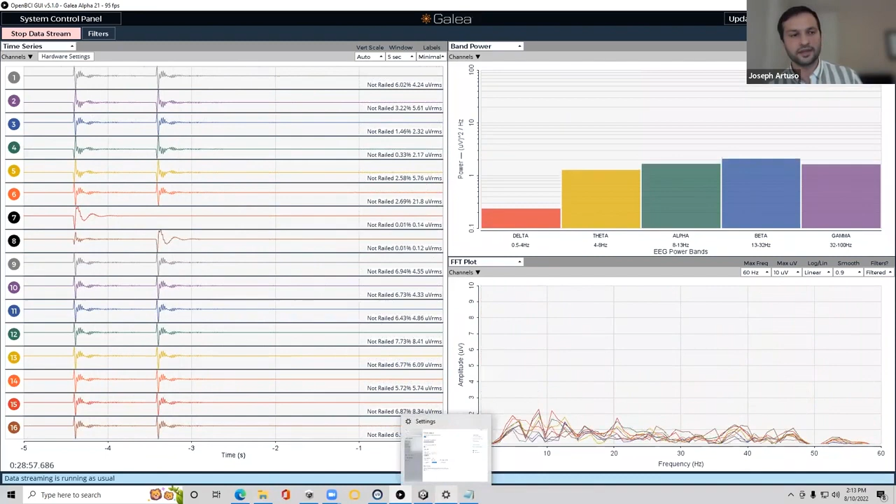There's a question about the FPS, whether Galea affects the FPS of the VR experience. We haven't really noticed that, but we haven't done explicit testing of it either. On the computer requirements front, it's really the VR that's the real requirement. As long as you can run the Varjo Aero, you'll be able to do everything you want with Galea. But we haven't done any FPS benchmarking while everything's running. We might try that in the future.

For what it's worth, running a video call is a much bigger obstacle than running Galea simultaneously. We're currently running the webinar, VR, the Galea GUI, and iMotions, I think, all off the same computer, so that gives you some idea.

I think it's also good to mention that Galea and the VR headset are currently two separate systems. The VR headset is connected to the computer with its own wire, and Galea is connected to the computer using Wi-Fi with its own separate battery. So it's essentially two separate systems, which we then synchronize on the software side of things.

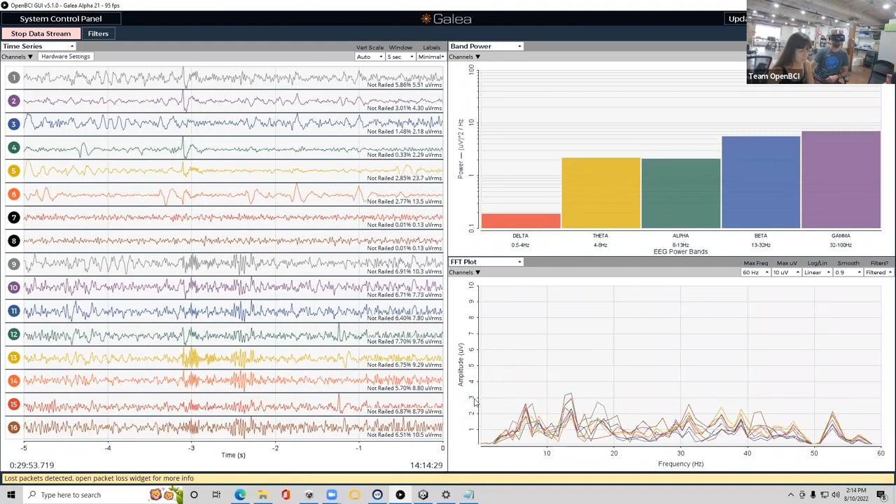Okay, there's questions about artifact removal and artifact detection, and generally what games would you make? There are also questions about whether you can explain what is wireless and what is wired at the moment.

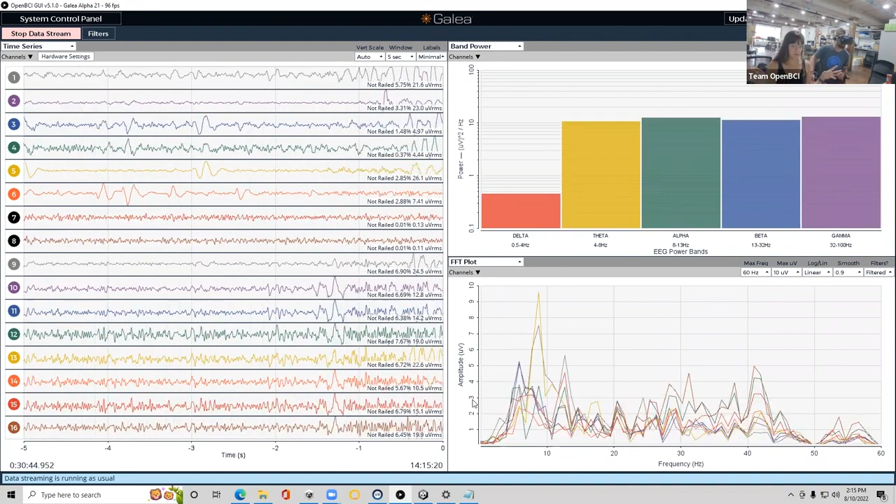Yes, so the VR headset at the moment is wired—it's just the display. The Galea part of the system is wireless and uses Wi-Fi to communicate with the computer, so all the data coming from all the sensors we've shown you is transmitted via Wi-Fi. Even if you don't have the display plugged in or on, you can still connect Galea to the computer because it's a separate system with its own on-off switch and its own battery.

The exception here for when we ship beta will be the eye tracking data. The image-based eye tracking data is integrated into the Aero headset, the Varjo Aero headset, so that data will be making its way to the computer over the tether as well. The rest of the physio data will be Wi-Fi through Galea.

Good point—we do have the option of sending data via a wired connection with Galea for those that might need it, but we don't usually use that because the Wi-Fi works well. So we run it in the office with Wi-Fi.

How is the comfort? I'm feeling it—around the hour mark is where I start to feel discomfort. He's been wearing it for about an hour and 15 minutes, a little more, since I put it on about 10 minutes prior to the hour. Almost an hour and a half of continuous wear. I'd say in the last 15 minutes I've crossed from not thinking about it into thinking about it.

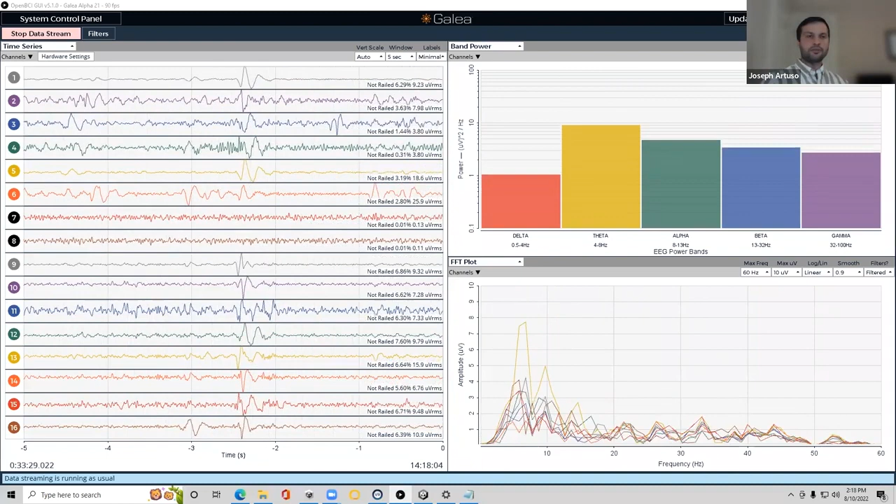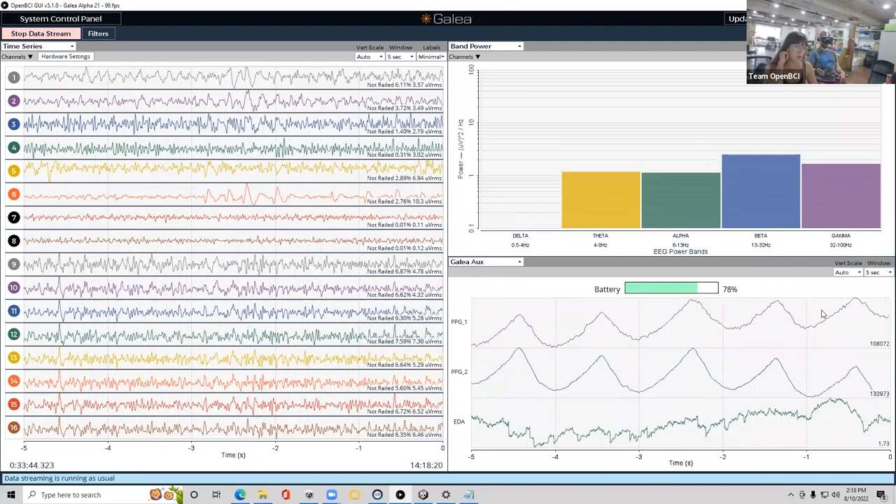There's one question about whether there's heart tracking, and the answer is yes. The PPG sensor in the forehead can be used to detect heart rate and heart rate variability. Right now the widget is just showing the heart rate wave, but we are working to implement different metrics like Conor mentioned at the beginning—heart rate variability, oxygenation, etc.

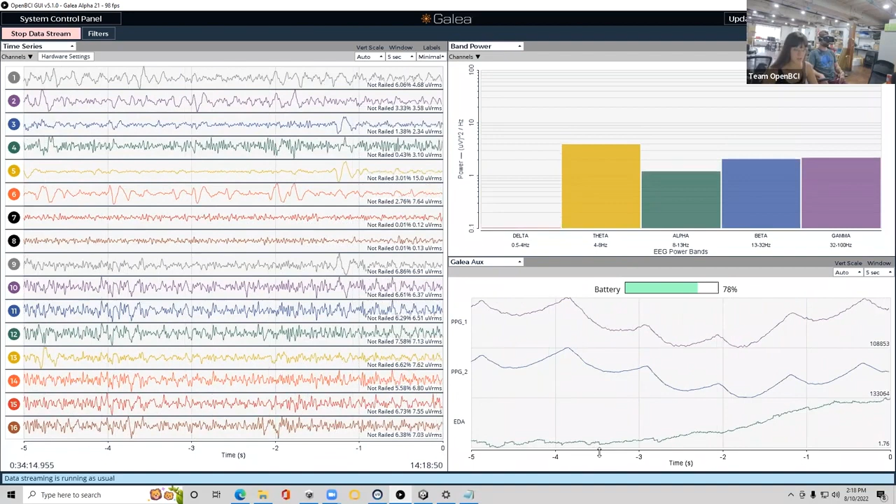It's also good to note we've been running the headset now for an hour and a half, and we've dropped from 91% battery to 78% battery over that time. It's also been consistent—we haven't had any crashes that required us to restart the device or anything.